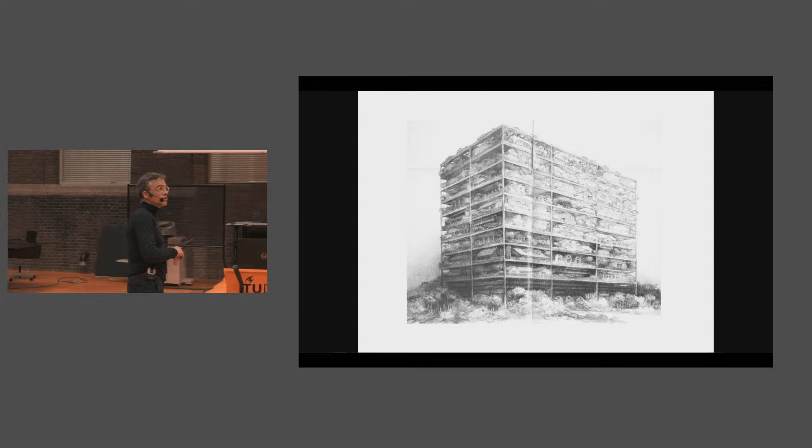About 10 years ago, we won a competition for a research center in the Autonomous University of Barcelona. And I use this project to explain a strategy of the office that we still believe is important, or at least is something very characteristic of our way of design.

In general, I've never met any architect that doesn't try to deal with that very complex equation that means to be an architect: to take from one side the demands, in terms of norms, budget, program, and so on, and on the other side, to take the availabilities. What is close, what I know, what is cheap, what is possible.

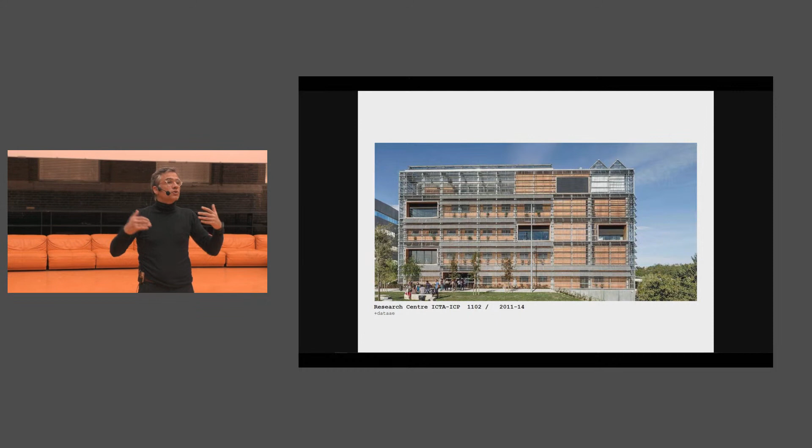And to put it together in a very complex equation. I think all the architects in the world try to do a little bit the same to succeed in that very difficult equation of demands and availabilities. And we do the same. But I think what is a little bit specific of our office is that what we try is that the two

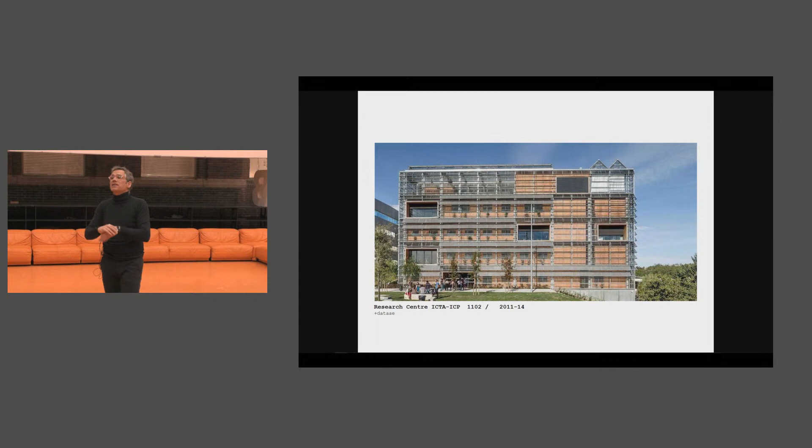very basic parts of any building, which are the structure that gives support for people's performance, and the envelope, the enclosure, the outdoor surface that protects that activity from the climate, those two very elemental parts that every building has, we try to ask them to perform the maximum number of roles possible, not only as a structure, but also

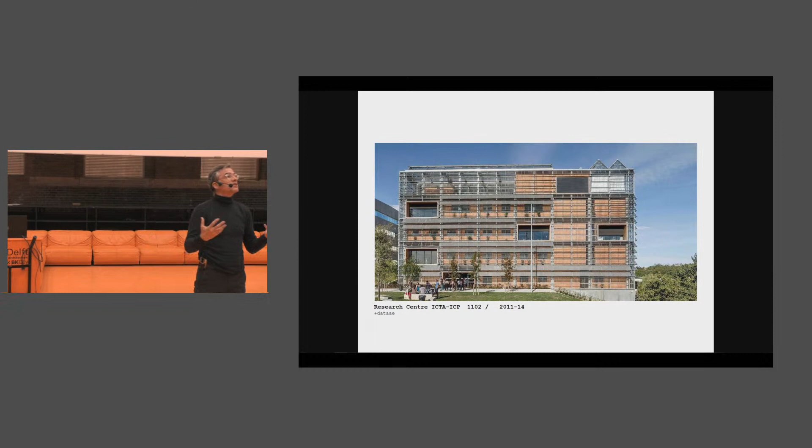helping the comfort experience with the inertia, with the mass, helping the acoustic conditions by designing the surface, or introducing the renovating air system into the structural shape. And the same with the envelope, the facade: asking the facade not only to be the rainproof system of the building, but also the part that produces cross ventilation, that protects from the sun, the parts that open and close, and so on.

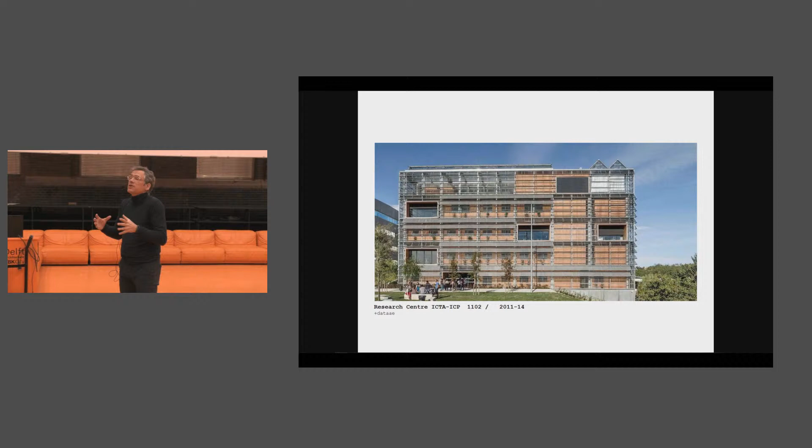So I think that this is very specific of the office, to ask those elemental parts of the building to perform as large a number of roles as possible, in order to go from the elemental to what we call the fundamental.

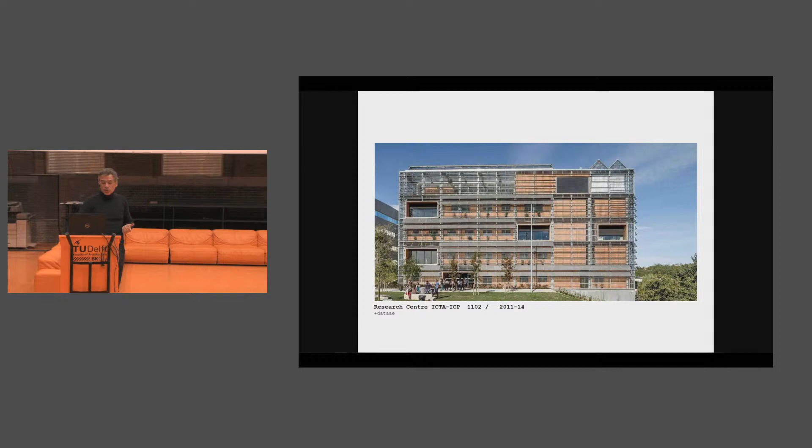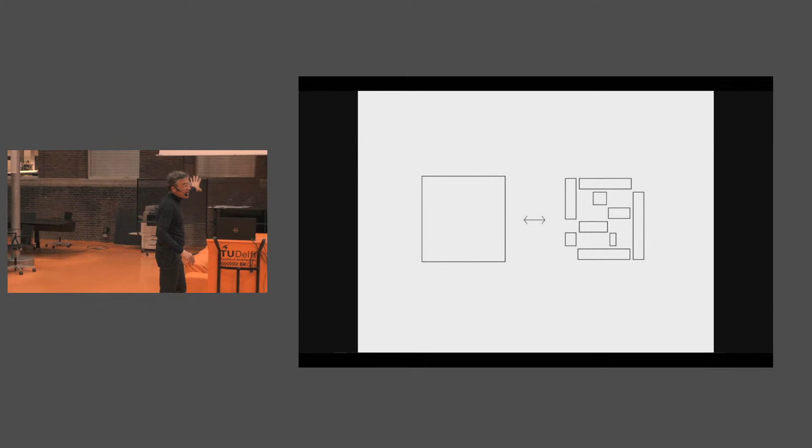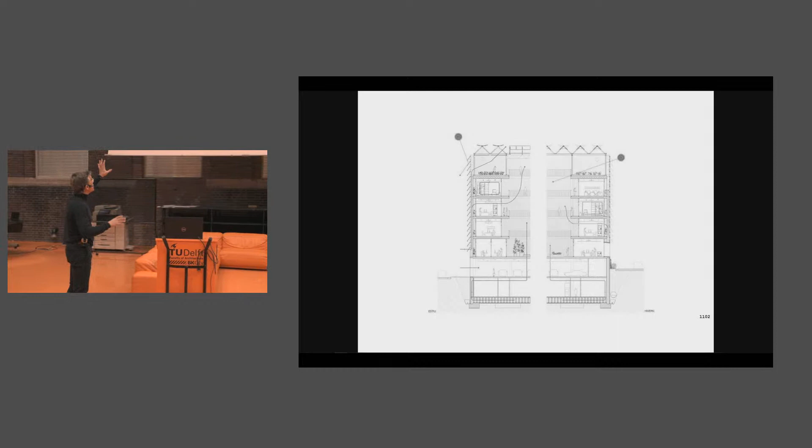the summertime behavior of the building, with this very simple concept: not a building with a greenhouse on top, which was part of the demands of the competition, because this is an environmental research center, so they asked for greenhouses on the roof. What we decided to develop is the idea of a greenhouse with a building inside.

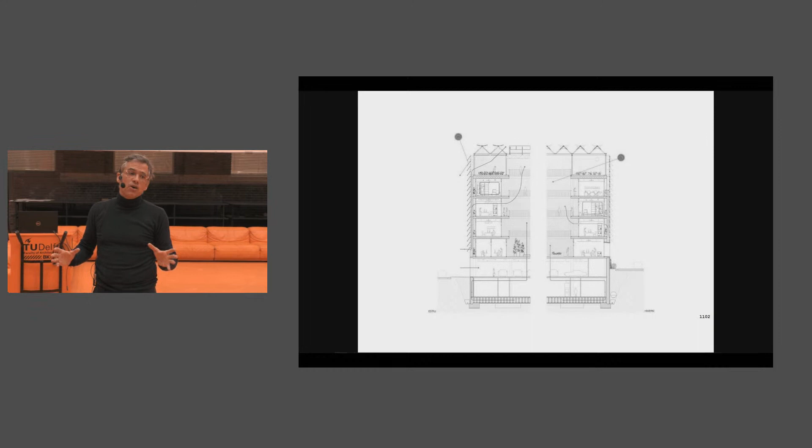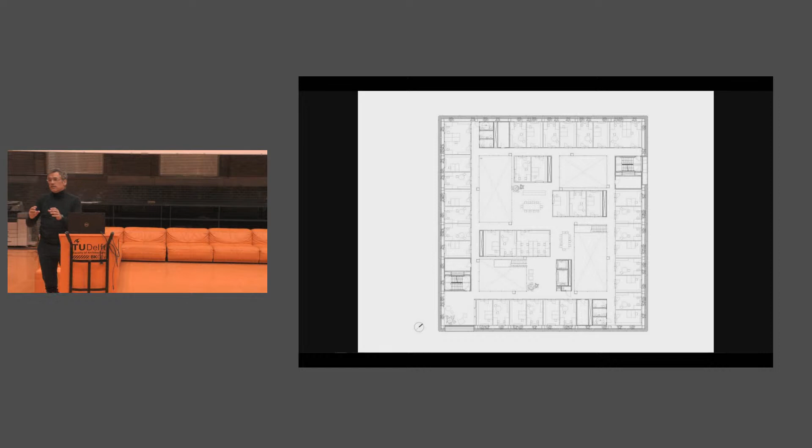The greenhouse works as a greenhouse in winter, and the whole facades open in order to produce shadows and cross ventilation with the inside courtyards in summertime. So the real program in terms of offices and meeting rooms is smaller than the whole surface, and it's full of that kind of intermediate space.

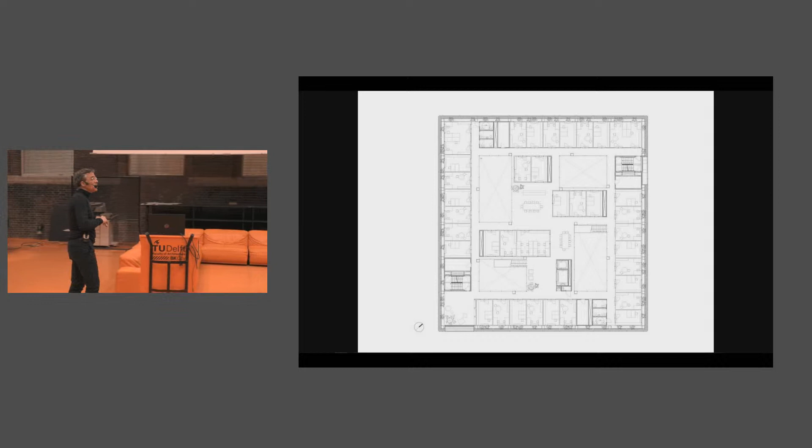The whole intermediate space of this building has no active systems. It's pure passive. It works just with the inertia and the cross ventilation. So it's nothing else, and it works quite well. So we get in those intermediate spaces from 18 degrees to 28 degrees. And as it's not real meeting rooms, it's just that kind of intermediate space, it works the whole

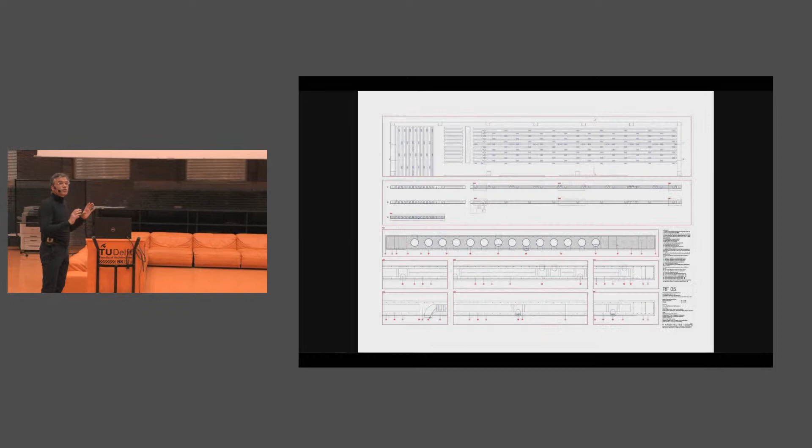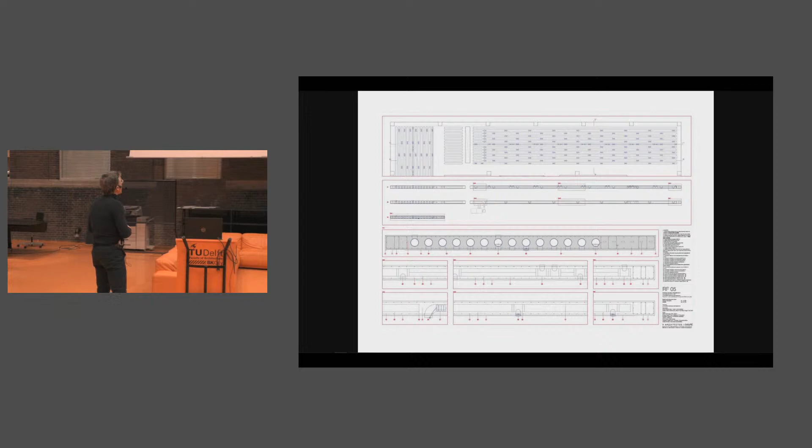year quite well. But just to show you those two elemental parts, this is the structure, which is a really heavy slab, a 40 centimeter slab. It's that dimension because we try to do large distances between columns in order to have a more free space in the whole plan. That gives us a lot of inertia, which is very interesting in order to temper during the whole year not only the intermediate spaces but also the indoor spaces in the timber boxes.

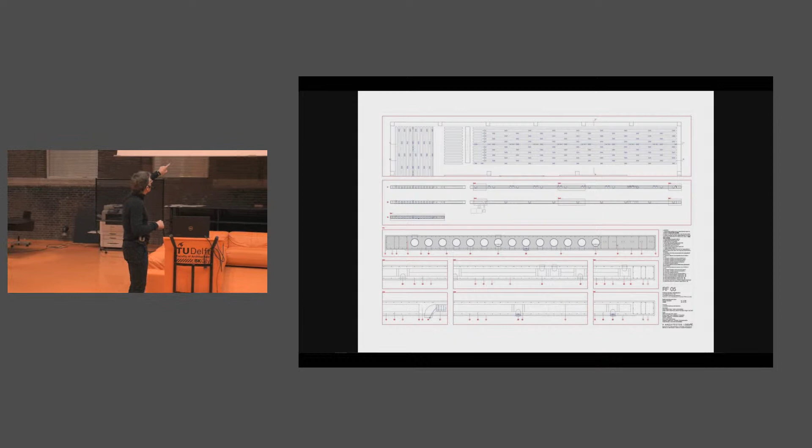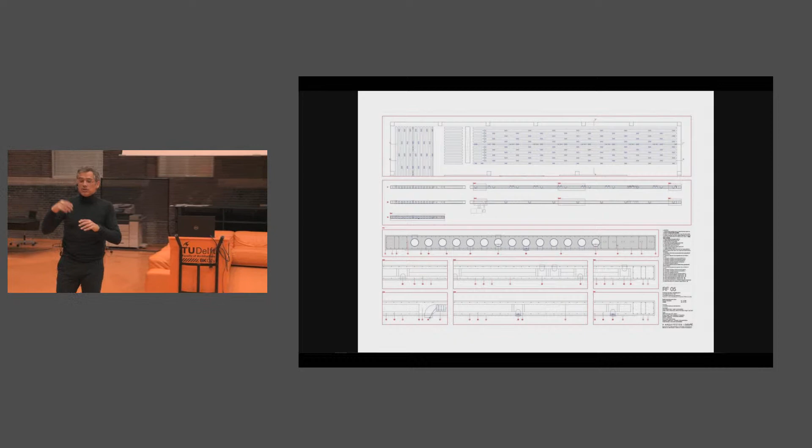But this is not just a slab, because by putting pipes into the slab it is also a system: the renovation air system goes through the slabs in order to use the inertia not only for the spaces but also to give better conditions to the renovating air system. And you can see how the slab has a curvy silhouette in order to have more interchange surface, but also to help the acoustic conditions.

I know that concrete has a very bad image in terms of sustainability, but we have to understand that in this case half of the building is completely renewable. It can be changed every 10 years, let's say, the envelope, the enclosure. And we decided that the structure, with all those attributes in its nature, because it's in the nature of the structure to have a lot of inertia, will be there over years and years. So it's a different idea, the idea of a long presence of the building, I don't know the name in English, but amortizar, to use it as large a number of years as possible.

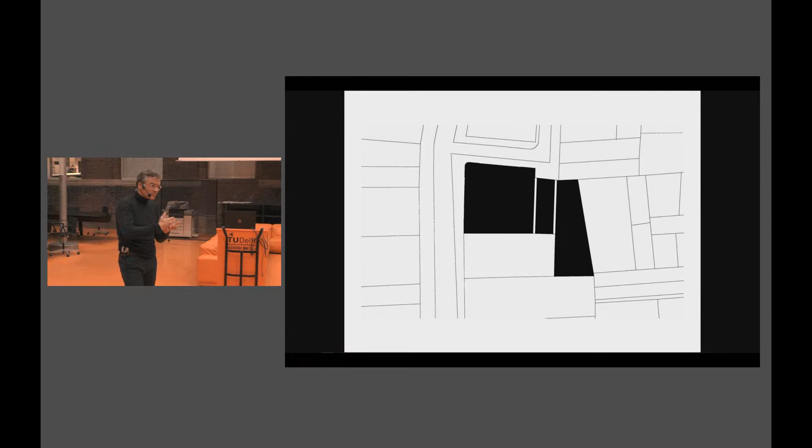In that case it was also a competition, and the only part that was protected in that building was the facade. You could demolish all the indoor elements of the building. We decided to demolish a part and to keep another part. And we decided that in terms of geometrical attributes of the preexistence, not in terms of culture, not in terms of history. What we understood from the research, we did a really large research to understand all the historical moments of the different indoor walls of that building.

But the final decision wasn't in terms of history, it was in terms of that if we demolish those specific structural parts of the building, we get far more, we get new behaviors far better than the former ones. So by demolishing that narrow structural parts of the building, we get a new intermediate space that is not only

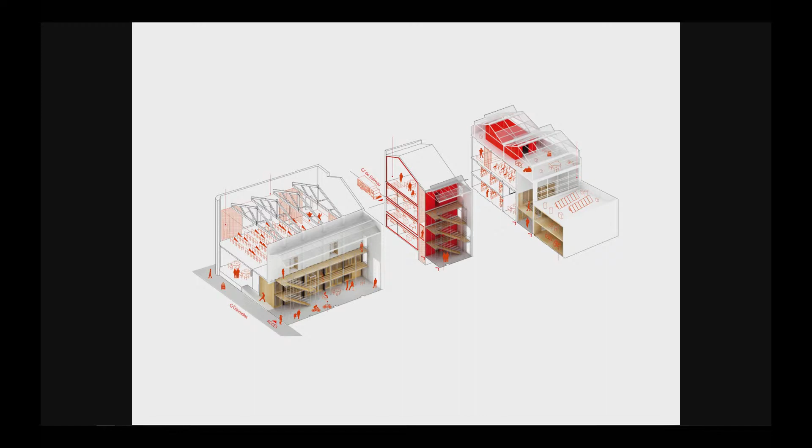producing a natural engine effect by moving the air in vertical, is also getting some sun gains from the roof, but it is also producing a new space where what is not programmed happens, what is unexpected happens just in that kind of spaces. The rest of spaces, the former spaces, the already there spaces, we just decided in terms of pure geometry that were interesting enough to assume the new program that the competition was asking for.

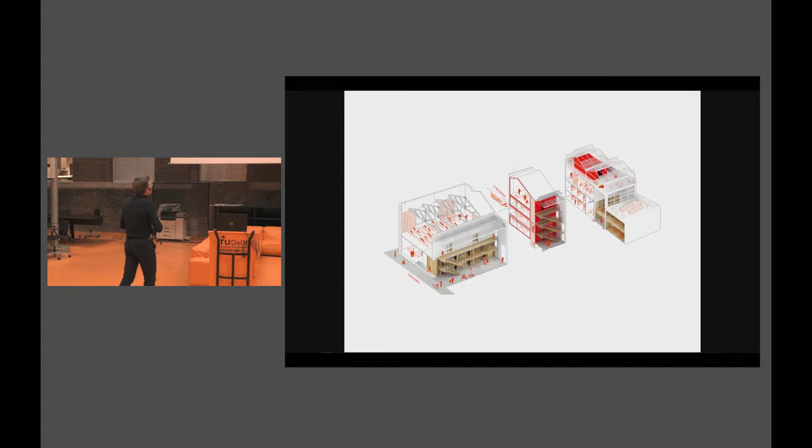So by demolishing just a part of the building, we get that kind of free spaces that are not just for circulation, but are also the way out of the renovation of the air coming from the most regular and programmed spaces. So this, for example, used to be a workers' cooperative. In that kind of buildings, they used to have a big general store where they didn't use real money. They used some kind of bonus or something like that.

And this used to be the general store of the workers' cooperative, and now is the rehearsal rooms. In terms of the competition demands, this room wasn't big enough. But in our opinion, if you look at the attributes of the space, it was good enough to become the rehearsal rooms. On the other hand, there's another part of the building that was better to be demolished in order to get that kind of vertical spaces for circulation, and to get natural light and to produce cross ventilation and so on.

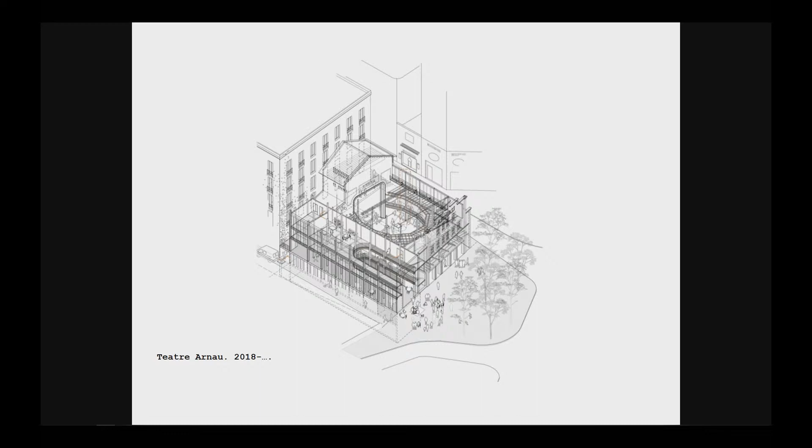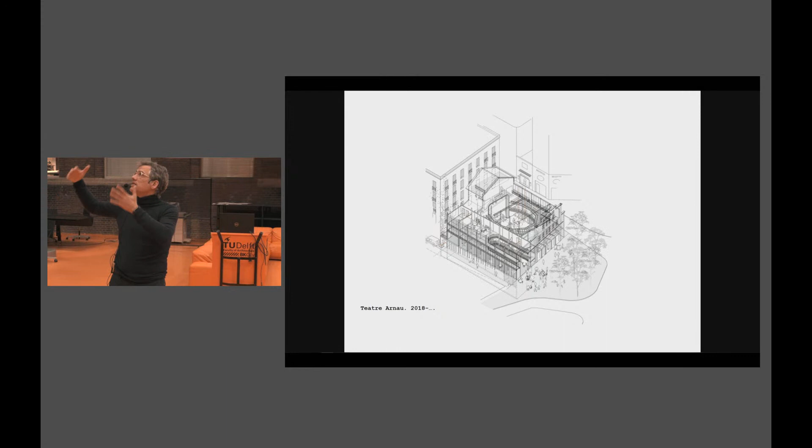But I explain that as fast as possible because, in general, we always use the pre-existence in terms of structural support because the walls are there. We love to work with that structural wall system because it gives us not only support but also inertia, so it helps in terms of comfort and so on. But in that case, that theater is a very typical theater in Barcelona, in that area called El Paralelo, close to the port, which used to be a very famous music hall avenue in Barcelona.

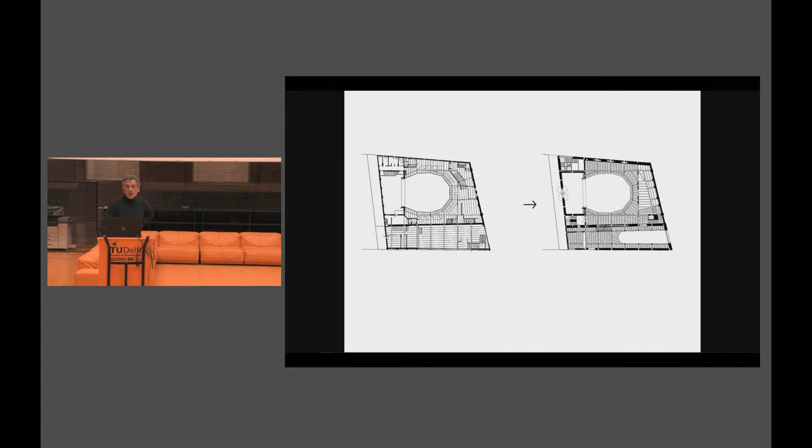But that kind of buildings used to be built very, very fast because of economic reasons and also because of legal reasons. People asked not for music halls or theaters, they were asking for typical industrial buildings built with very light timber structure with very light steel beams over it. So the Arnau Theatre is the last one of that kind of construction that still remains on that avenue. The beautiful part of the building is the last example of that kind of timber structures.

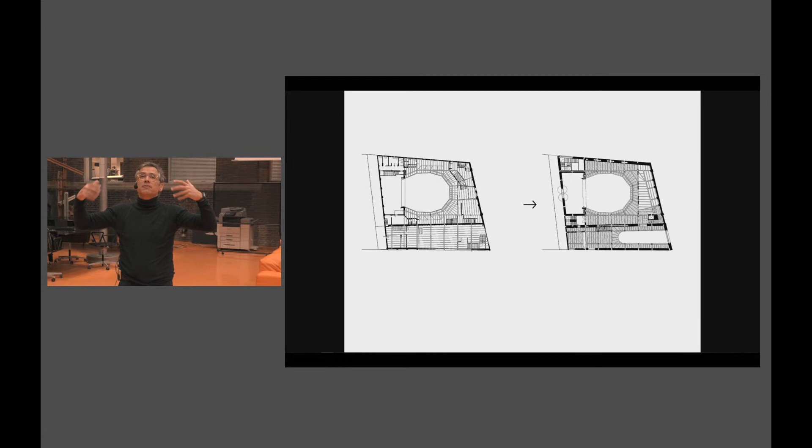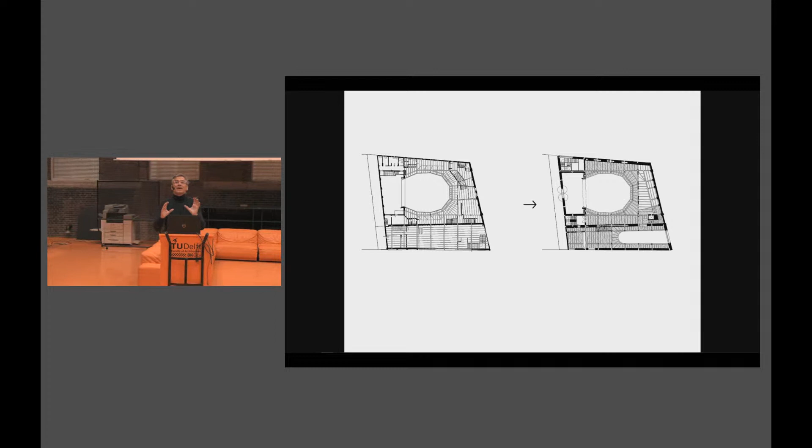But after 150 years of life, the timber doesn't support anything anymore. So it's impossible to put the new program over the existing timber structure. It's completely putrefied. But we have discovered a couple of ways to take advantage of that former structure. On one hand, it's just the pure construction of the indoor atmosphere. That beautiful timber structure, by taking some extra weight from it, will produce,

well, the new theater is far more that kind of Peter Brook ideas theater and so on. It's far more flexible, completely flat. We just want one of the upper levels for the audience. So the rest of the levels are going to be partially naked in order to give that image, to produce the experience of the vertical spaces of the theater by looking at all that former timber structure.

Okay, so it's like that in order to explain the origin of the building and to produce that kind of vertical spaces with all the memory, and we think that it's going to be beautiful. But this is not the important approach to keep the timber structure there.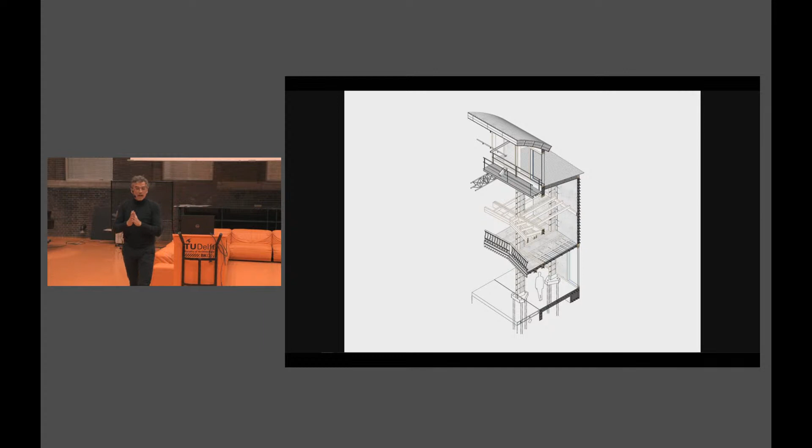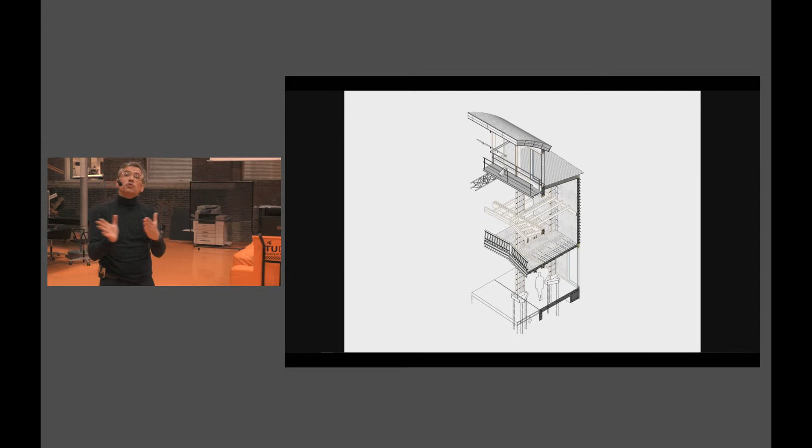What we propose, and it's been accepted and we will try to do, is that all that timber vertical structure will be part of the precast system for the new structure. What wasn't the structural part of the wall will be taken off, and will be substituted by a new concrete structural wall. But to give shape to the concrete, we will use the original timber columns to support the precast system for the concrete, okay?

Not only in the vertical, but also in the horizontal, giving at the end a beautiful image. I don't know the name of that, sorry. Yeah, giving that kind of, you know, that Japanese tradition to put together again the pieces of something which is broken.

So it's a little bit that kind of, well, we are taking off the clay walls, which are not structural, and we are putting there a concrete structural wall, but we use the timber columns that are not able to support slabs and to be legal and so on, but are still resistant enough to support the precast system that will give shape to the concrete.

Just trying to explain specific parts of those examples to understand. I'm sorry, now it's a little bit blocked.

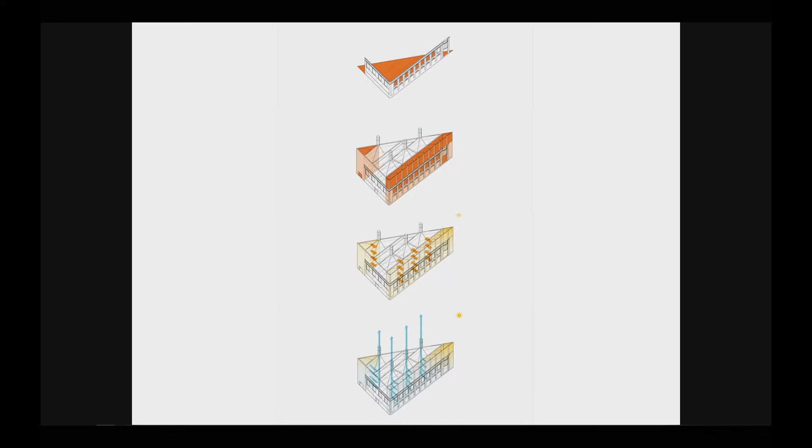On one hand, two of the facades were occupied by protected facade from a former old factory that used to be in that part. The factory used to be huge. Just because of the growth of the city, the rest of the factory is just that very bizarre shaped plot with those two big walls designed to be a factory that now has to assume a scholarship program, basically classrooms.

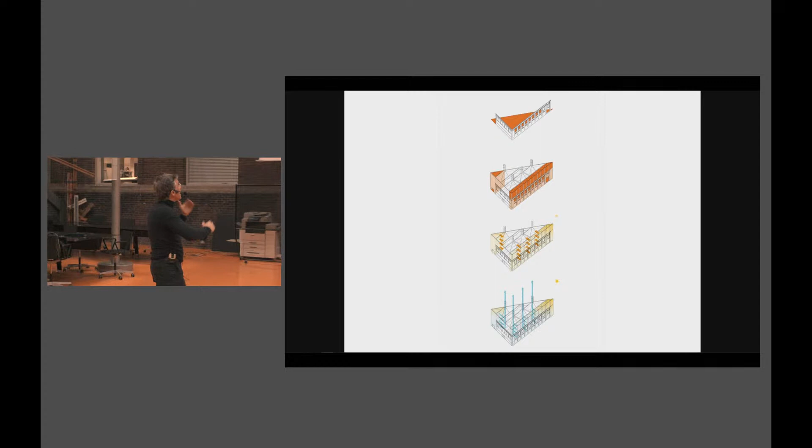70% of the program is basically classrooms. So the height of the old facade, the difference between the proportion of the halls - the south facade was the large facade of the factory. So that means in order to get natural light for the classrooms, we decided the first strategy, very basic strategy, was to do a 2 meter step behind the facade to get more levels than the composition levels.

That the original facade has. So to get four floors for the new building, we do that step behind in order to produce that courtyard, to get more natural light and to be free to design, to give dimensions to the different stories, and also to give free dimensions to the new windows.

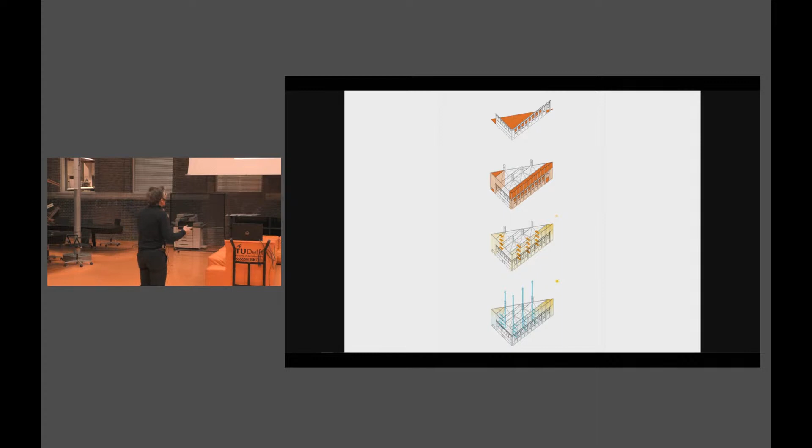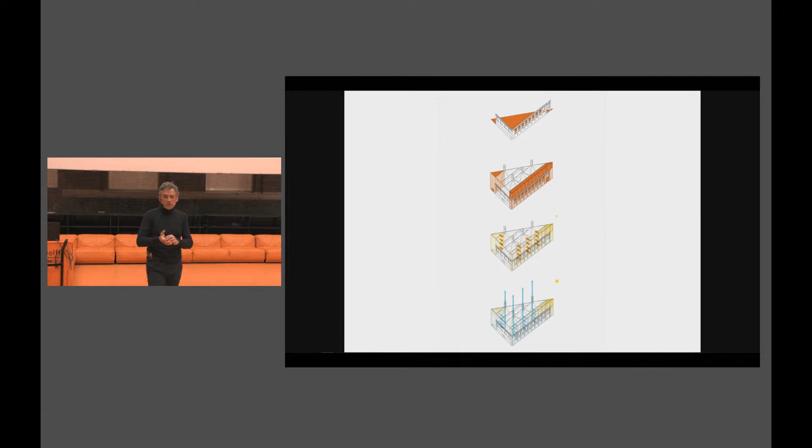After that, we decided that the basic behavior of the building was gonna be like the first research center I explained, a little bit like a greenhouse in wintertime. In wintertime, with a small classroom and 25 adults inside, it is absolutely unnecessary in Barcelona to have a heating active system, because you are natural walking ovens, people, so in that building it was absolutely unnecessary.

In summertime it's completely the opposite, so we need to ventilate a lot in order to take off all the excess of heat because of the people. So the building works as a greenhouse in winter and as a courtyard and as a natural engine to move the air in a natural way to take off all the excess of human heat.

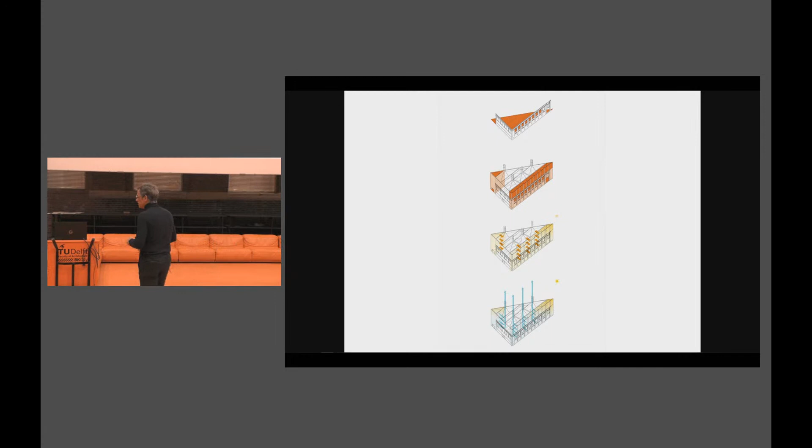But just in terms of program, it's really simple. It's just a corridor in the middle with program on both sides, placing the classrooms in the larger facade and the administrative part of the program on the opposite facade. And it's not that interesting.

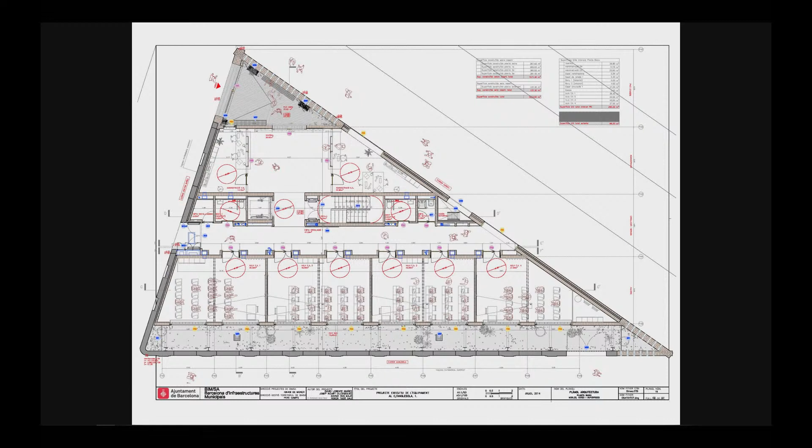What is interesting, at least in my opinion, is that the structure that again is a compressive wall system based on that idea to put a lot of inertia, as much inertia as possible, into the spaces in order to get a softer interior climate, which is simple to understand in Barcelona. We are a city that we live close to the sea.

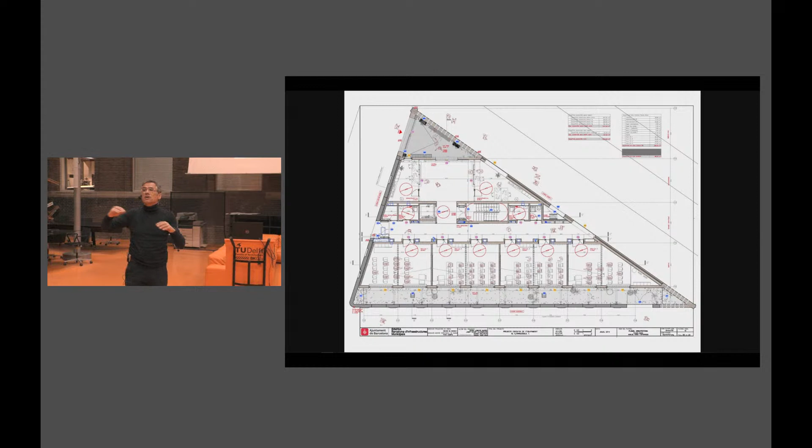The sea gives us a lot of inertia, and that's the reason why Barcelona has a softer temperature average than just 100 kilometers inside Catalonia, where there's a bigger difference between summer and winter. So the inertia, thanks to the structure in that building, is the reason why the average temperatures don't have a big difference between day and night, summer and winter.

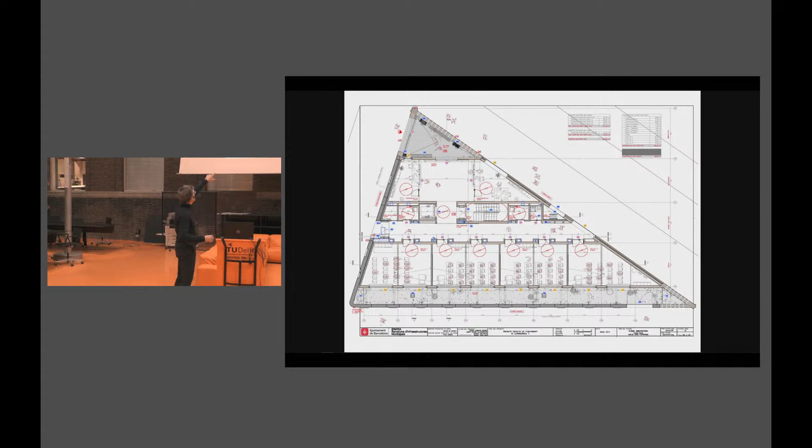So the building is basically that structural system in order to produce inertia, but what is more interesting is that section where the idea to give attributes to the air as the basic tool to produce comfort in the spaces is thanks also to the structure. It's the structure in terms of geometry, it's the structure in terms of its self-stability, that produces pipes to create spaces that allow the natural movement of the air.

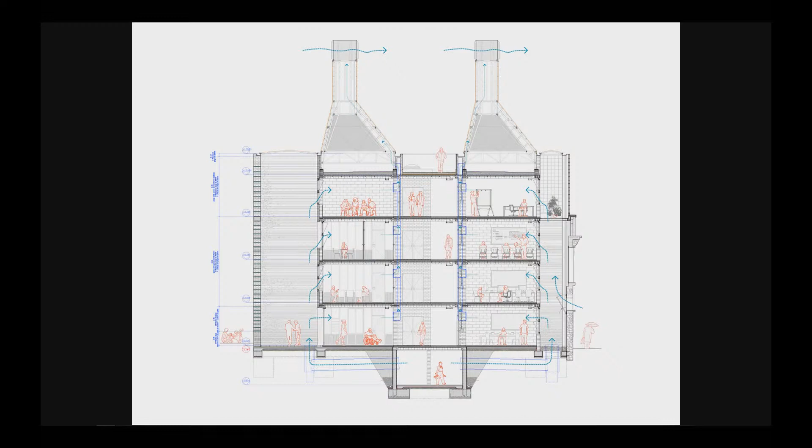So the air is used not only to renovate it for healthy reasons, but also for comfort reasons, to take off the excess heat in summer. To do all that we have two basic elements, everything built into the structure: the inertia, and also active pavement systems with pipes carrying cold or hot water to produce comfort conditions.

But what is important in that project is not that part. The big challenge in that project was not only to produce comfort with the inertia and with the geometry, but also to move the whole air without using any kind of artificial fan.

So all the air—in summertime about 15,000 cubic meters of air per hour—is moved thanks to a natural engine, which is that strange shape in the roof of the building. This is the sun chimney. In fact, it's three different natural engines. The first is the sun chimney effect, meaning a greenhouse effect in the pyramid part of the chimney.

You need a captive layer and an absorbing layer, which is the black one, and the air in between, in summertime, because of the sun energy coming in at 90 degrees—this is for real, we've done not only simulations but monitored the building—that hot air goes up. Because of the depression that this movement produces, the whole inside air has to move up to replace it.

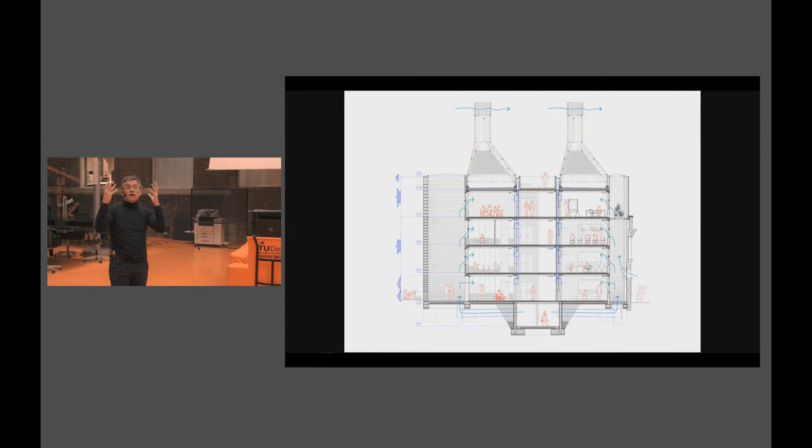So the 15,000 cubic meters of air moving every hour in summer is thanks to a physical effect. It's not because of design.

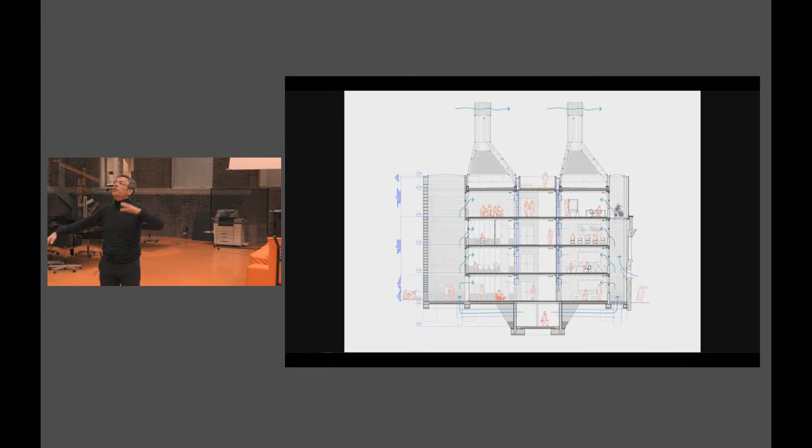Well, it is related to design—the shape of the chimney follows the angles of the sun during the day. To the east is one kind of slope, to the south another slope, to the west another slope. We designed all this thanks to engineers able to understand that we didn't want to solve this problem with engines, but needed simulations to design that kind of natural engine. Thanks to the people doing those simulations, we defined the sun chimney element.

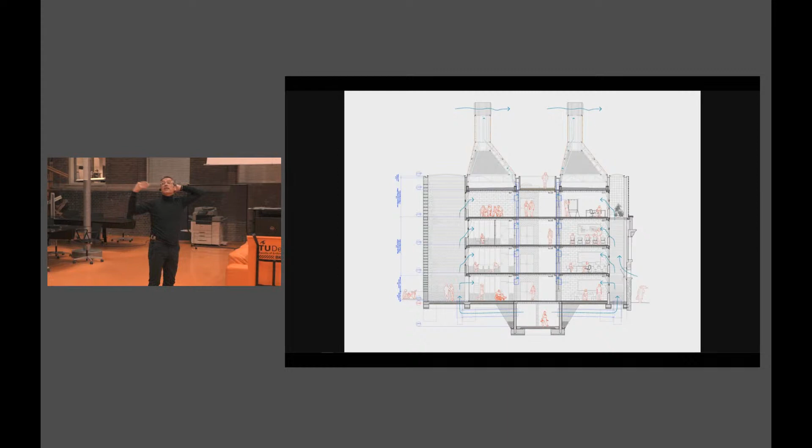There's also a chimney effect before that: if you have more than 9 meters difference in height between the chimney and the last space, you also get a typical chimney effect in terms of vertical movement. And there's a third natural effect, the Venturi effect at the top of the chimney, which works at night, since it's at night that you also have to remove a lot of the excess heat from the day. So the sun chimney, in fact, combines three different natural physical effects.

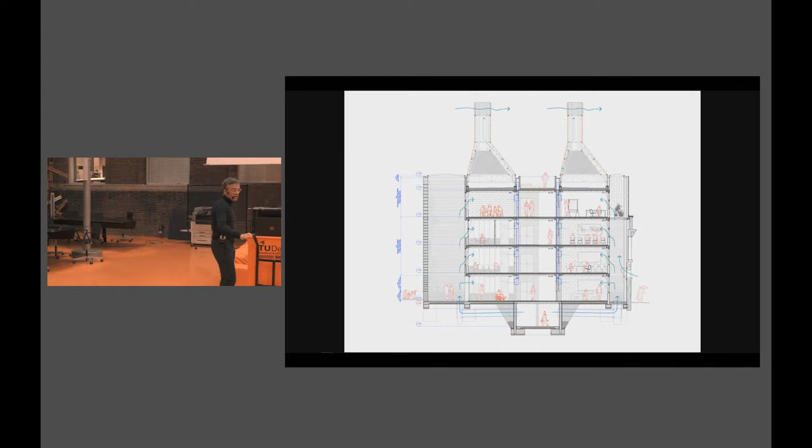I'm talking too much, I'm sorry, because that's the kind of problem we have when we describe our project—it becomes boring because you explain concepts that aren't really funny and don't convey the excitement of the design.

What's really exciting about that building is that when you go inside, you realize 15,000 cubic meters of air is moving per hour. It's amazing, because you feel the air moving as natural air, even though this is classrooms, which can't be open in summertime due to street and corridor noise. So you have natural air movement thanks to those natural engines on top, moving through the structural geometry without any annoying noise from other classrooms. That's what's interesting about the section.

The section is the same in the south, with that facade and courtyard you can see here, with the sun chimneys on top. This is the south courtyard between the two facades. It's the same in the north, but because of the geometry, the courtyard is completely different, though it's the same idea.

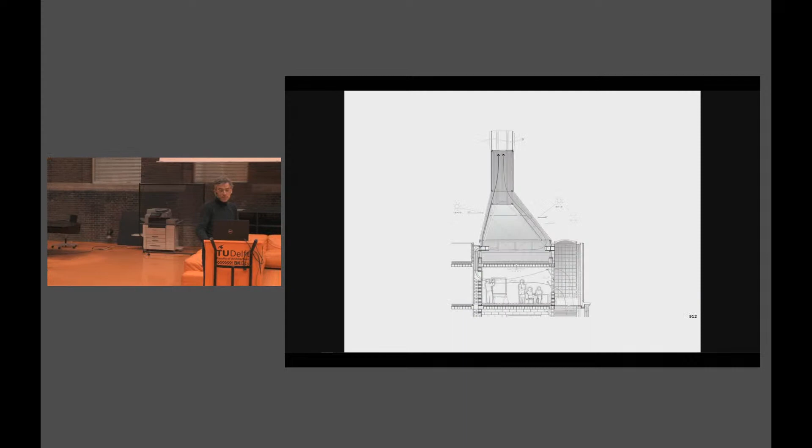Taking too long—okay, I'm ending.

This is a winery we've done in the south of Catalonia, in a beautiful place called El Priorat. It's a not very well-known wine region, at least not outside of Spain, but in Catalonia it's really well known and they produce amazing wines. It's beautiful because in this area, which is traditionally really tough for making wine due to the difficult topography, agriculture is hard—it's not flat, it's really difficult.

The tradition of that business was completely familiar—small plots, small productions. That's why, in general, wineries in this area are located in the towns, really small wineries, not in the middle of the landscape, but in the basements of houses, just as small as that.

In this case, a guy bought an existing winery, but they used to make the wine in the middle of the landscape in a warehouse with really simple systems. Good wine, but not in a beautiful building for the representative part of the business. So they asked us to build that winery in Gratallops, which is the name of that beautiful village.

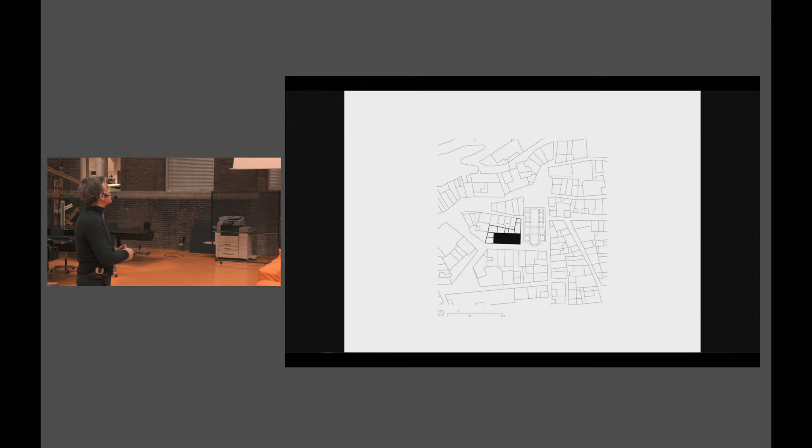To do that, he bought about 5 former attached houses. One of the plots wasn't a house, it was a fronton—a kind of wall people in towns used to play against with a ball, like tennis but harder. It's close to the church, so it's a really nice place, and the plot is perfect with that presence of the church.

The norms required us to stay away from the partition wall, so we decided to concentrate the indoor program—the vinification process—and keep all that free space for the logistics of the process: getting the grapes, doing the harvest. Part of the logistics is done in that outdoor corridor, while the vinification and technical process is done inside the box, let's say.

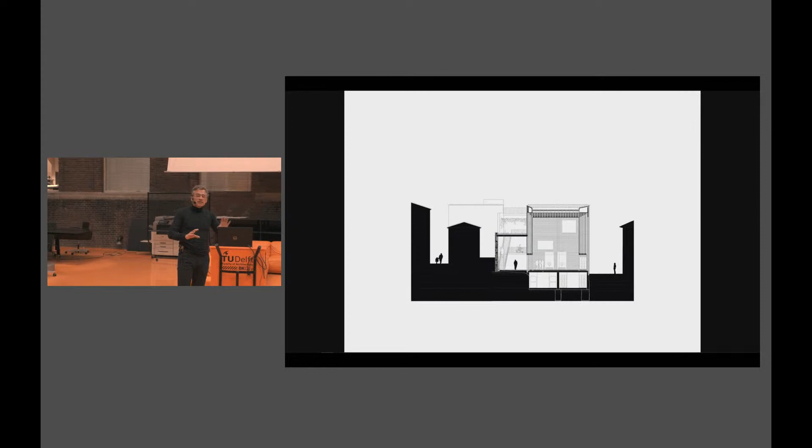So that produced two very different kinds of spaces. The first one is easy to imagine: it's a kind of street that surrounds the vinification building. It works as a real street. It's completely open, just covered by open roofs, green roofs with some greenery and so on. It works as a small hall.

It works as a small store. It works as a bar in certain moments. It's the open space to introduce the grapes into the building and so on. That's the left part of the building. And well, it's beautiful, but it was not the part that I want to talk about, which is the fluid part of the building and how we manage again the air in that building.

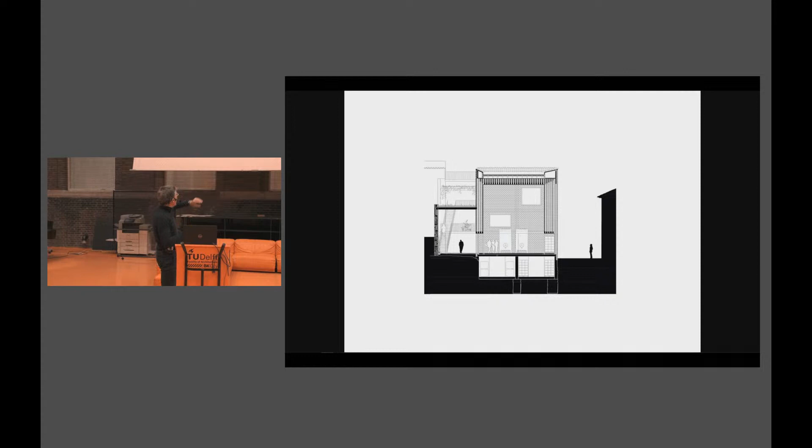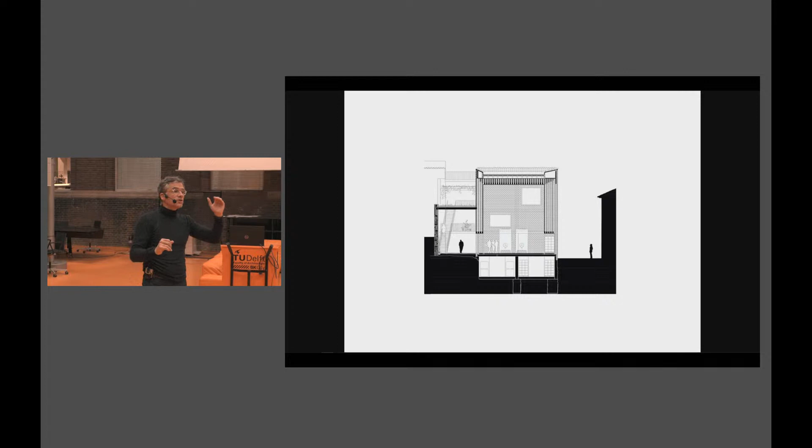That's that street, let's say, which surrounds the building. But what is interesting, in my opinion, talking about that fluid part of architecture, is how we designed the vinification building. All those multi-layer walls are again a strategy to put as much inertia as possible into the space, okay? This building again has no active heating system, and it has to be between 14 and 20 degrees the whole year.

In summertime, this is a very hot area, and in wintertime, it could be cold. The cold is not a big problem for the vinification process, but excess heat could be a problem, okay? The process itself is exothermic, but it is controlled by the pipes and so on. But the space has to be in specific conditions, between those 14 and 20 degrees during the whole year.

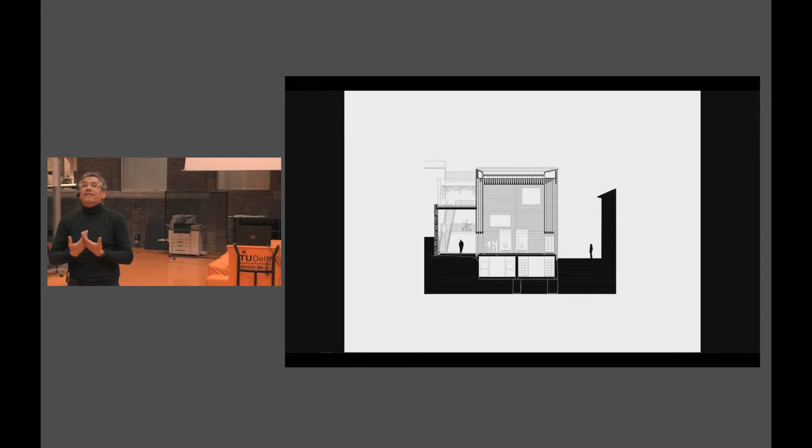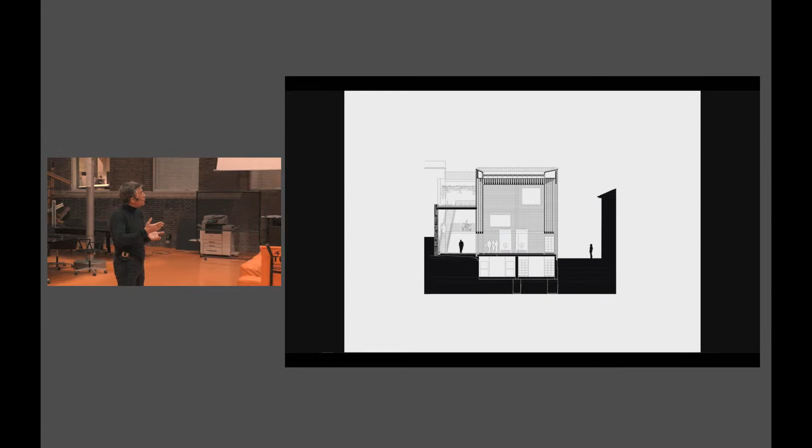And we get that just with the thermodynamics of the design, which is a lot of inertia with the structural walls, as much as possible, doing that kind of multi-layer walls. Those structural walls, which also support ceramic beams crossing the space, work to produce as much surface as possible for the interchange between the air and the inertia of the structure, okay?

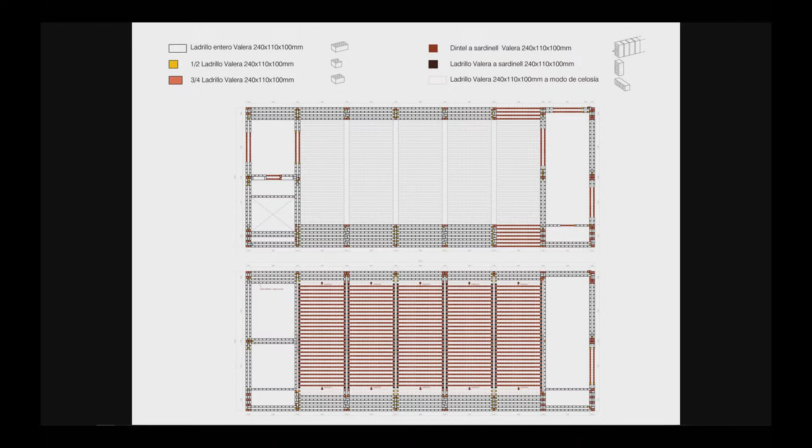So that's why the wall is not just a one-layer wall, it's a multi-layer wall, so that thanks to convection the air goes through the walls, touching all those surfaces and taking advantage of the inertia to make softer, to temper the air conditions. And also it's really beautiful.

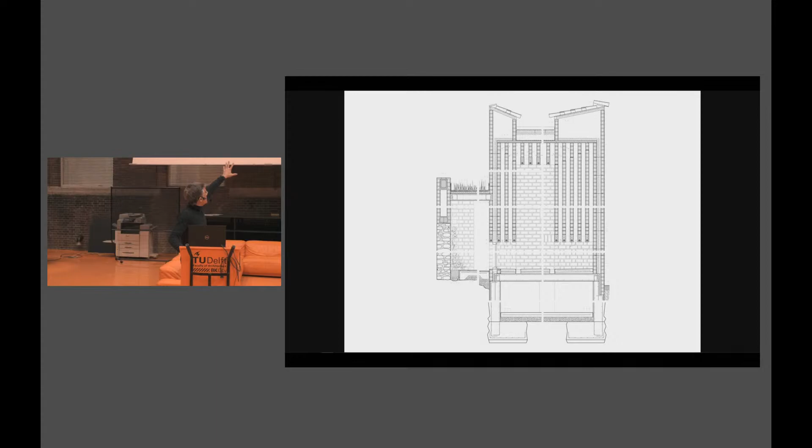When the outdoor conditions are good enough, we just produce an opening on the top in order to get cross ventilation and bring the outdoor conditions inside. You have to imagine that in Barcelona, 75% of the hours during the day are good enough to live in the street. The problem is the low quality of our buildings. It's worse to live inside than to live outside, at least in my city.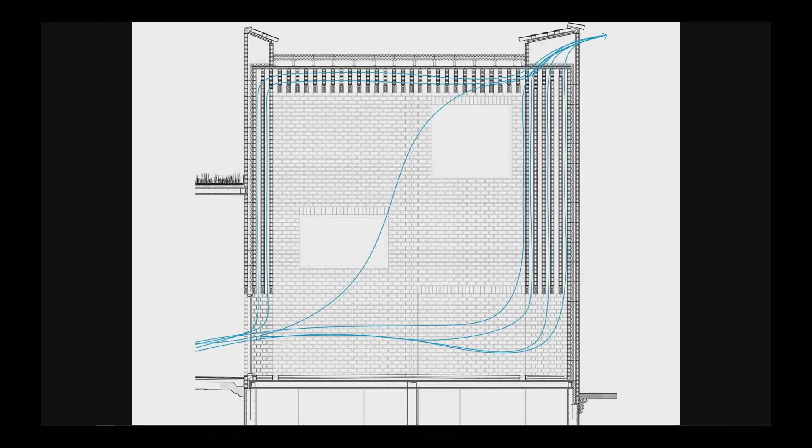So it's not so amazing or so bizarre that just by opening some windows and taking advantage of the inertia, a lot of hours during the year, you can be as good as is necessary, which is between 14 and 20 degrees, okay? But this is a regular, typical convection, cross-ventilation system and so on.

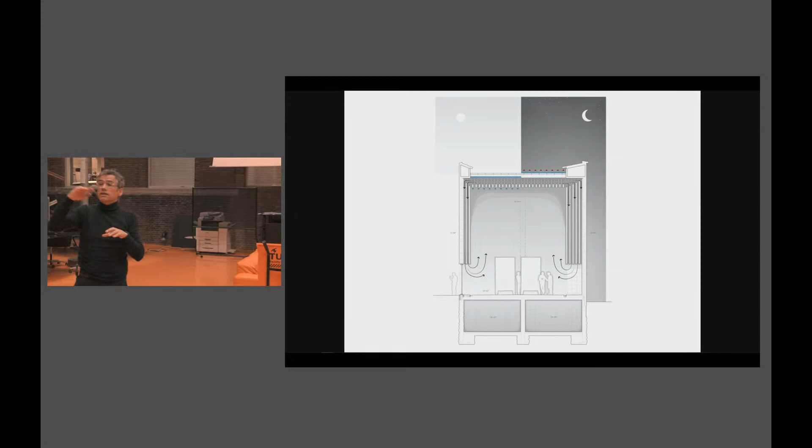What is funny, beautiful, interesting about that building is that we've developed something like a swimming pool on the roof. That swimming pool is a very thin layer of water, just 10 or 15 centimeters, and during the night the water is just outdoors, okay? Getting freshness from the sky.

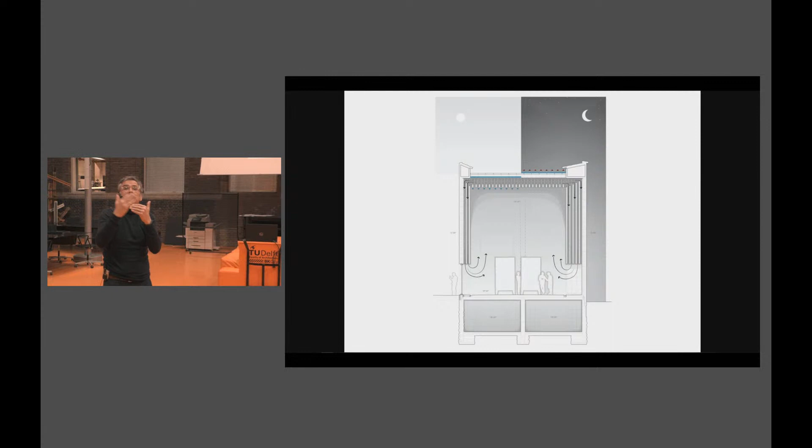You have to know, in terms of thermodynamics, that you're giving energy to something that is fresher or colder than you. The sky is far colder and has a lot of inertia, far more than the water itself. So there's a high level of interchange with the sky during the night. Even in summertime, especially in summertime, that process is interesting.

During the day, the water goes down to the chamber below, okay? Giving the freshness it gets during the night to the structure. So during the day the structure gets colder because of the touch of the water. So it's just conduction, okay? The conduction of the coolness from the water to the structure.

So the air that gets hot goes up, touches the structure, moves horizontally and goes down again, producing that interesting convection movement, which was simulated, of course.

It was not just a pure intuition of the architect. It doesn't exist. We did hundreds and hundreds of simulations in order to get that idea and to check it. And now that we've built the building, we've checked that it already works.

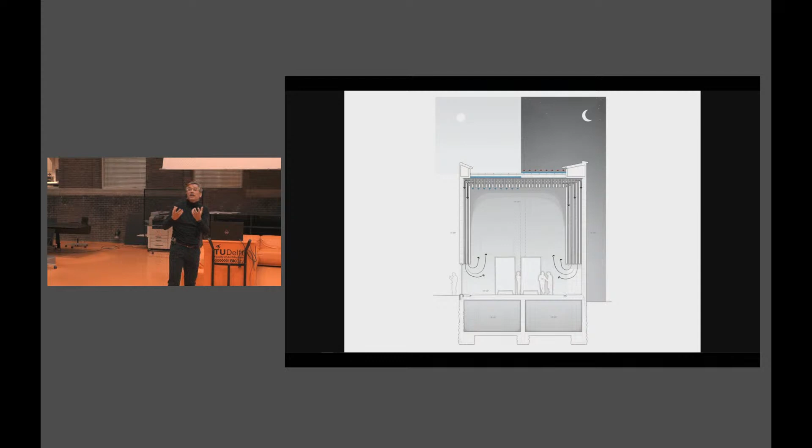Okay, so that's the basic idea, which works quite well, which is not only to use the water because it has a lot of inertia and it gets cold faster than other systems, but also to put that freshness into the structure, giving all that cold to the air and producing that movement.

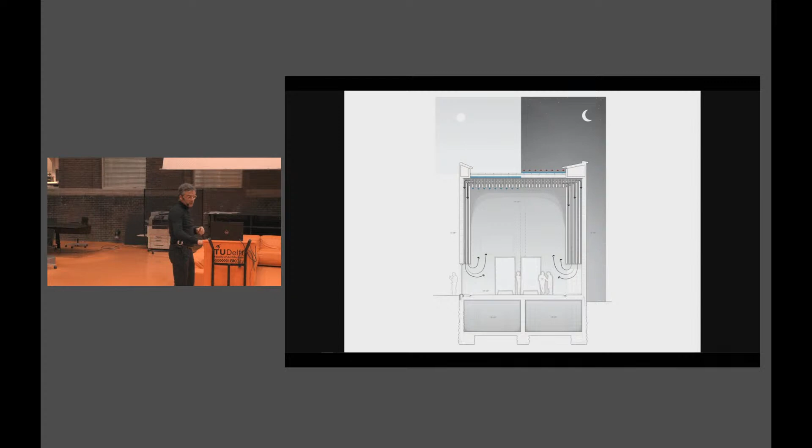Okay, so this is the inside space with all the beams. The beams have parts that are open, so the air moves in that direction and goes down through the walls. And this is the swimming pool. Okay, and just to end, well, I'm really ending now. This is the last real project.

So whatever I've explained, what is still a real clear concept for us, what still now surprises us, and it's not exactly about the vernacular, it's about a specific kind of constructions where the structure and the geometry of the space is the same. The structural elements and the geometry that defines the space is the same.

25 years after we discovered that kind of stuff that the four of us share together, still now we recognize in that kind of constructions that the attribute of the experience is in just one place, and this is very powerful. This is absolutely powerful.

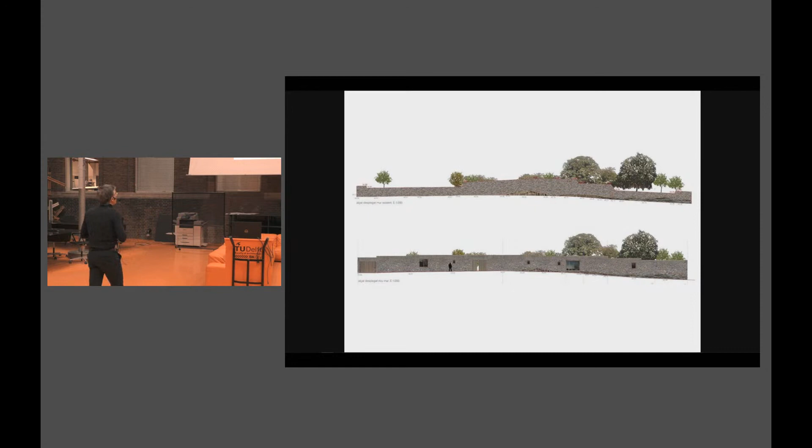So we completely agreed with the client, and we were happy with the decision because of the beautiful wall. But we went to the council, and they told us that it was not possible anymore because the street has to be wider because of the vans and the lorries that cannot turn the corner. So all our idea disappeared in the air because the wall has to be demolished in order to get 1.5 meters more of width in both streets, as you can see in the drawing.

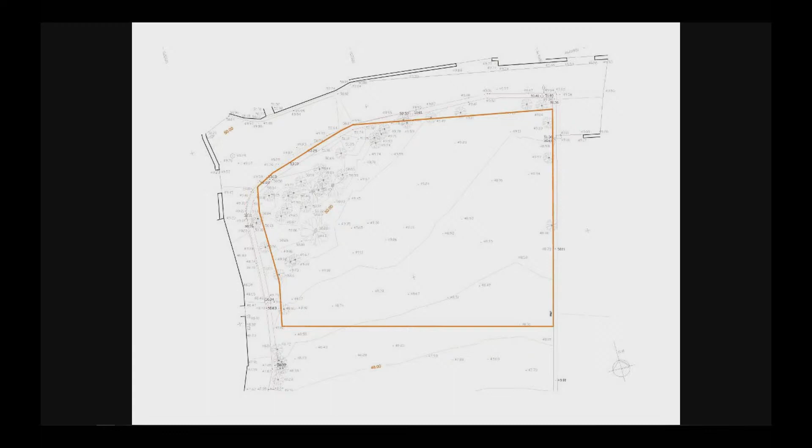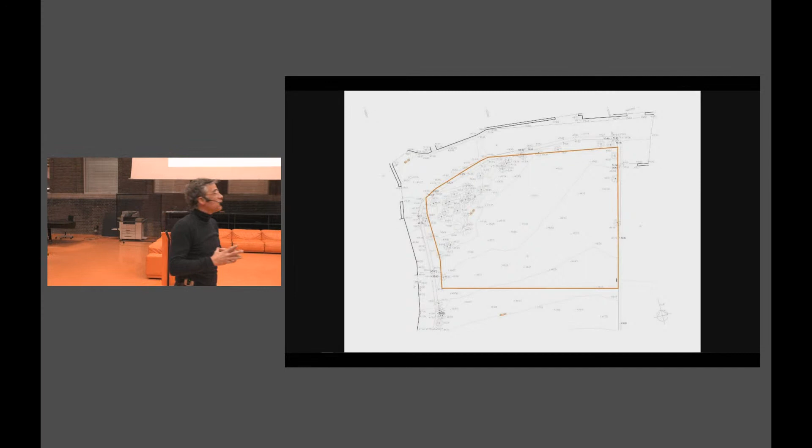We were completely destroyed, crying, and so on, because... But there's a sentence in Spanish, I don't know how to translate it, but it's something like, no hay mal que por bien no venga.

That means there's no worse, or there's no bad, because after the bad comes the good, something like that. When something bad happens, something good is coming. And it's always like this.

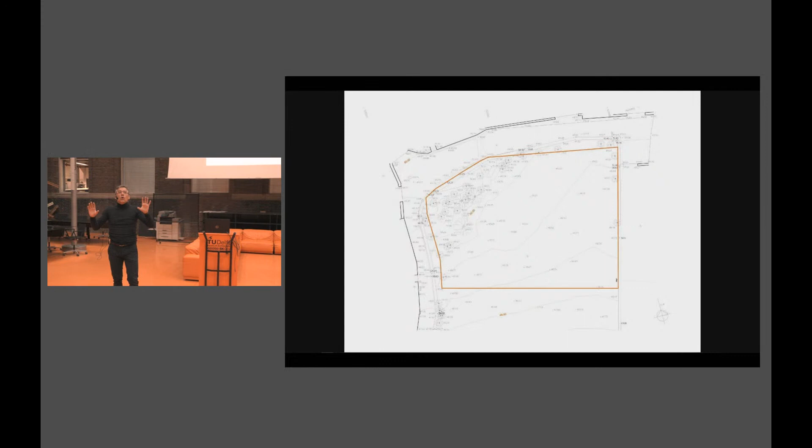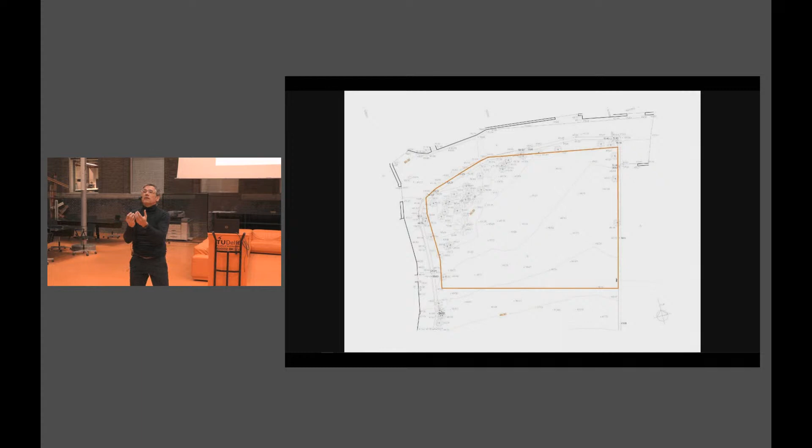So coming back to the heritage concept, before a cultural approach to the heritage, we ask the heritage its attributes, if there's already something there that can help the project. But the wall was demolished, so nothing else remains. But something remains. What remains there was the stone. The old wall, the former wall, has to be demolished, but the stones are already there.

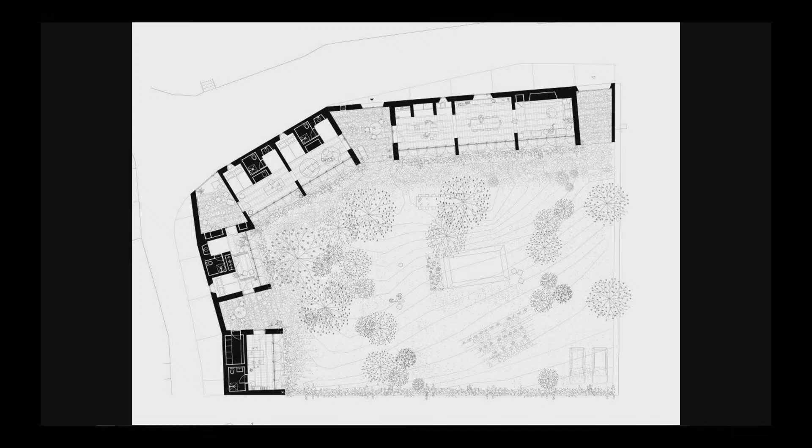So the project was the same, to develop a porch house attached to the wall, but the wall is not the same, but it's the same stones. So we just detached the stones, okay? We demolished the wall, and we did new walls in cyclopean concrete, without any kind of reinforced bars, without any kind of steel bars, using lime instead of cement, using just natural limes, using the plot stones,

mixing it with the earth of the place, doing that kind of artistic, beautiful process, checking colors, just using the limes of the place, in order to produce these very wide walls, like 60 centimeters, with a lot of inertia. This was the example I said at the beginning, a one-layer house. All the attributes that you ask of the enclosure of a house are placed in just one wall. It's not only structural, it also has very small glass insulated air balls that give a certain level of insulation to the wall.

Don't try it here, please. This can only work more or less in South Europe, okay? But in this case, it was enough to have a certain level of insulation. Remember that this is a weekend house. It has no artificial heating system. It just works with the width of the wall, with the insulated air balls, giving a certain level of inertia, placing the biggest stones at the bottom, because it's more necessary in terms of structural behavior, placing the light part of the stones and the glass balls at the top of the wall.

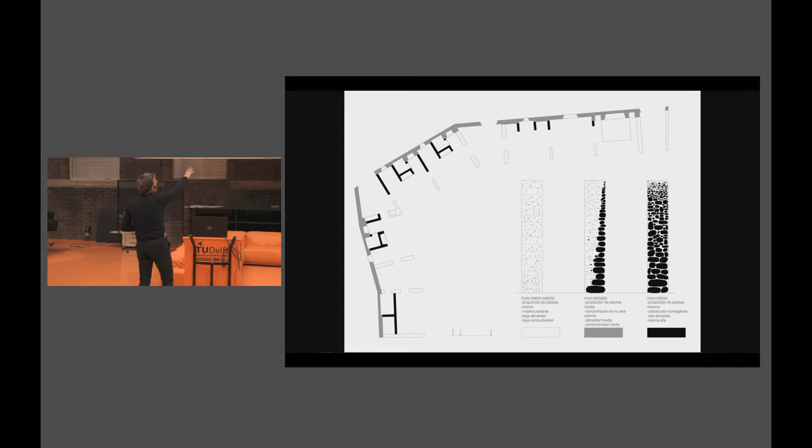So we produced that using also the stones, and this is the nice part of the story, because there's an end for the story: we placed the stones according to the position, if it's for the facade or for inside walls, because the council was asking us to demolish the wall, but the same council normative asked for facades with the stones, which is what we call crocanti, which is really nasty, to produce that idea of fake vernacular, fake everything.

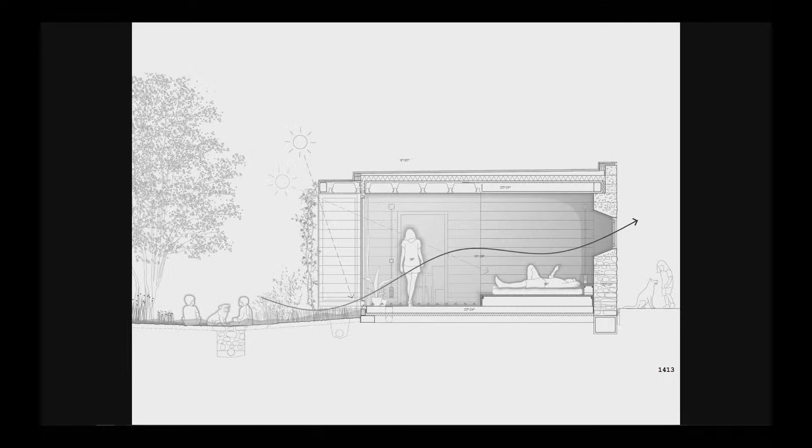But here you see, we placed that in a very traditional system, like traditional clay walls, 10-centimeter layer, 10-centimeter layer, pushing, and so on. But the end of the story is that after taking off the formwork, because this is a pure precast system, we made some digging over the surface, taking off the former stones. So the stones show up again in a different place. It's the same stone with the former color, just in a new structural behavior, because this is not anymore a pure stone wall. This is a concrete wall.

But the stone is not only working structurally, it's also making sense with the surroundings, because it's facing the same facades it used to face during the last 100 years. So this is the concrete wall where, after the precast process, we just dug the surface to get that color, not in the windows, because the lime gives us better conditions against the water.

So you can see here how the former narrow street has become wider, and the new position of the facade. The inside is completely the opposite. The house, as the original concept, still remains a pure porch facing the south. This is a real weekend house without any active system, meaning that during the week, when it's closed in winter time, it works as a pure greenhouse.